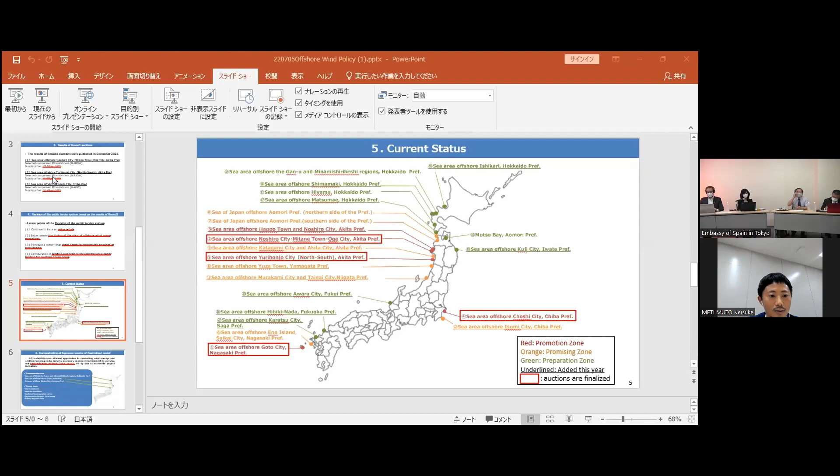Hello, everyone. This is Muto speaking. Can you hear me clearly? Yes, we can hear you clearly. Thank you very much. Now sharing my screen. So do you see my screen now? Yes, I can see that.

Now I would like to begin my presentation. Hello, everyone. Once again, my name is Keisuke Muto, the Deputy Director of the Energy Efficiency and Renewable Energy Department at METI. I'm in charge of renewable energy, acting as the Deputy Director in this agency. Most recently, there is an emerging trend in offshore wind in Japan. So we would like to talk about the Japanese offshore wind policy introduction and the current status. Thank you very much.

Please take a look at this page. First of all, this is an overview of the Japanese energy strategy. In October 2021, there was the cabinet approval of the sixth Strategic Energy Plan, which says that by 2030, the renewable energy contribution should increase to 36 to 38%. This is a very aggressive target, and it was announced in the strategic plan.

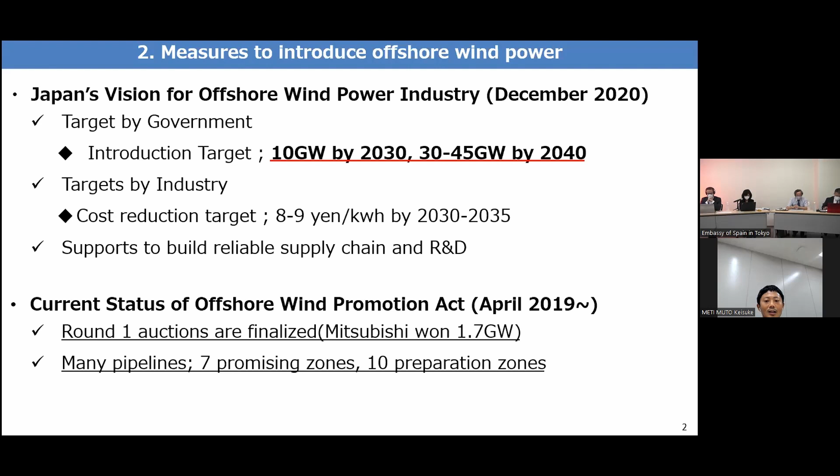And already we have 7 promising zones in the pipeline, and there are also 10 preparation zones as well. Therefore, we will be seeing more series of rounds to come. As I mentioned, for this round 1 auction result, first of all, to have these auctions, the government indicated the limits per kilowatt hour, and 27 yen, 29 yen was set as the government initiative, 29 yen per kilowatt hour.

And of course, the cost is not the only element to determine in terms of offshore wind promotion. The sea areas will be dominated for a long period of time. Therefore, it's very essential to have good collaboration with the local participants and residents, as well as the fishery industry, and have good project operations itself. That feasibility is very essential to determine the result. But still, we believe that this round one auction was very successful.

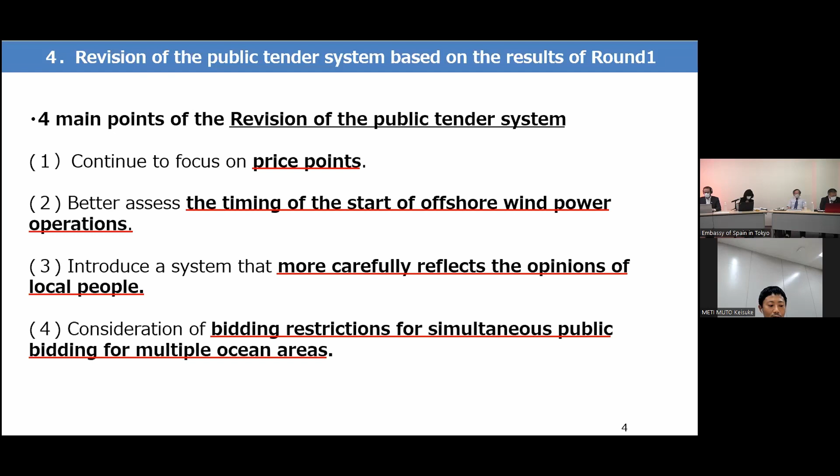However, we do not want to disconnect the supply chains or create inefficient supply chains. So that's our potential concern. So if we are to provide some kind of limit, we need to ensure the volume of the project as well. Probably 1 gigawatt should be allowed. Maybe we should offer the tenders on a 1 gigawatt basis. So that's the first stage.

So this is our current state of pipeline creation. Areas where we have made public tenders are highlighted in red, and those areas have already been finalized.

Orange areas are the promising zones, and at local municipalities, we are conducting some consultations and trying to promote them to the promotion zones. So when they are promoted to the promotion zone, they will be under the auction. So we would like to promote those orange areas.

And the green areas are the ones that are interested in this offshore wind, especially in Hokkaido, Tohoku, and Kyushu areas. We see those zones coming up. And not only those areas, but we'd like to create more of the pipelines going forward. That would be our continuous effort going forward. And every year during the summer period, we scrutinize new potential zones. And this summer, we will update this map as well.

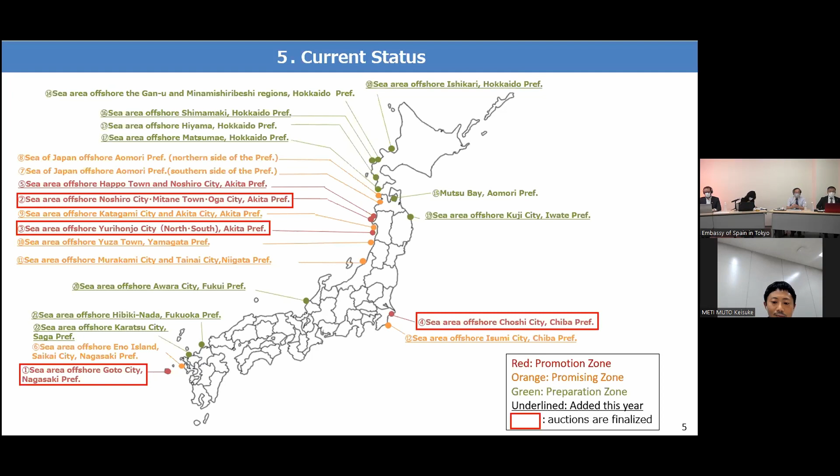And overseas, in order to promote offshore wind, these countries are saying that rather than having redundant research done by operators, the central government should run the research and provide the necessary information, which would be more efficient. That kind of debate is being held. So we in Japan are thinking about introducing this system.

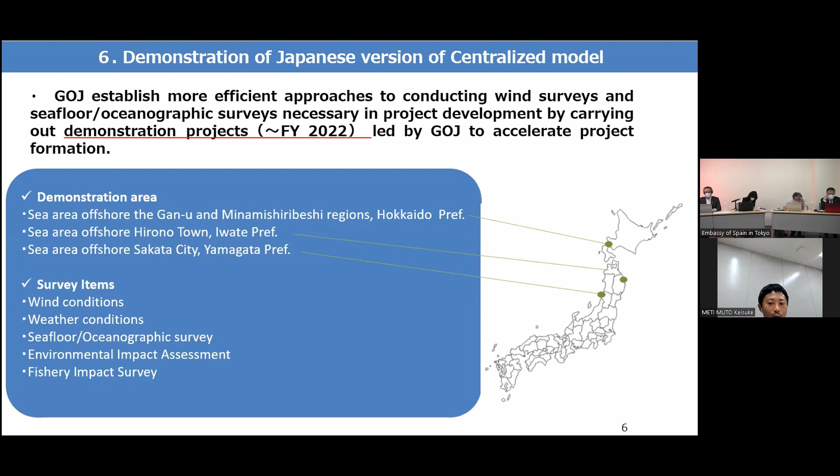Specifically speaking, what kind of research specifications would be adequate will be demonstrated in three areas in 2022, and from 2023, JOGMEC will be outsourced to run these surveys, governed by the central government, to survey the wind conditions and so forth. And based on this data, from 2025, we will run the public tender based on the data offered by the central government. This is my last slide.

These are the floating offshore wind activities. The central government has a Green Innovation Fund, especially for large and inexpensive projects. We are favoring to offer this fund, and we have two phases, 1 and 2. In phase 1, for floating offshore wind, we are developing cables, blades and so forth. So we are developing the elements of offshore wind.

And in phase 2, we will demonstrate the large-scale floating system, leveraging the phase 1 results so that we will be able to apply that to large-scale commercial projects. And we would like to leverage those phase 2 demonstrations for future commercial projects. So briefly, I have explained the current state of the policy around Japanese offshore wind. Thank you very much for your attention.

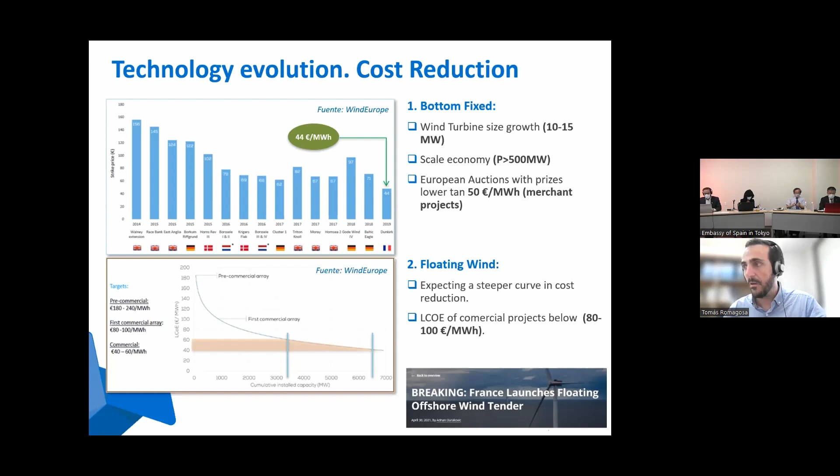Considering floating wind, which is the technology that will be applied in Spain because we have very high depths and a very short continental platform, in Spain we will surely go for floating wind. The costs are higher, but we expect a cost reduction even steeper than bottom fixed. The strike price for the French offshore wind tender was around 120 euros per megawatt hour, but probably the project will go down below that strike price and even below 100 or 80 euros per megawatt hour.

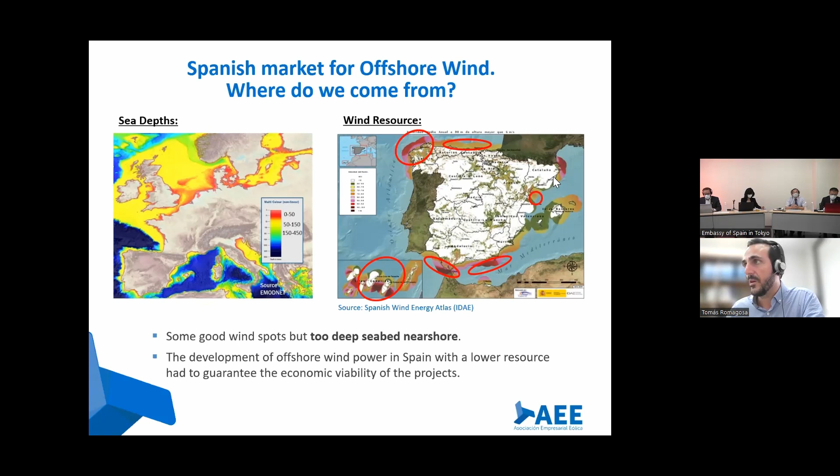What is the situation of the regulatory framework right now? Well, that is one of the main problems blocking offshore wind development right now, because we don't have all the regulatory pieces ready and approved. We have some of them. For example, we have a general auction design framework, which has been used for onshore projects and for solar PV projects since November of 2020, so that is already approved.

And also we have a Spanish offshore wind energy roadmap, which was published in December of last year, but we still have pending the approval of the maritime spatial planning, and also the regulation of the permitting process specific for offshore wind farms. We have a permitting process for all onshore technologies, but offshore wind farms have some particularities that have to be modified, and this is also pending.

So now the government has closed the possibility of presenting new proposals for offshore wind projects until all this regulation is finally approved. What our government has in its plans is that by the end of this year, by the fourth quarter of 2022, we will have all this pending regulation finished.

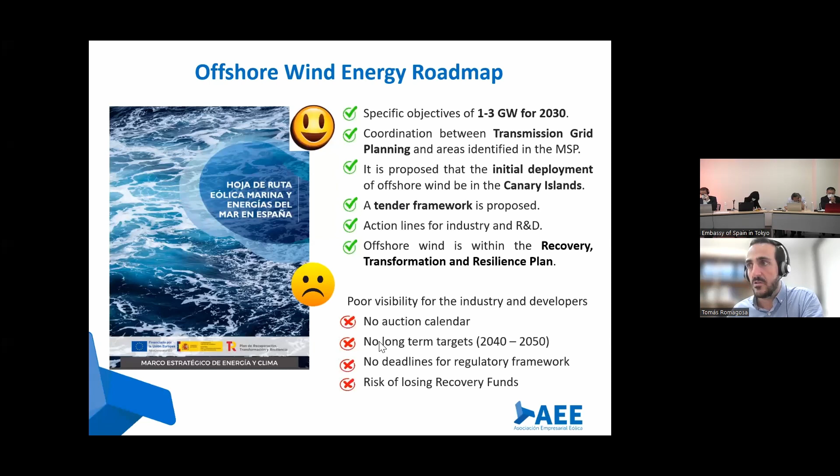Another characteristic of the Spanish market is that we already are a very important industrial hub for offshore wind, because we have all the value chain that is needed to build up and to design an offshore wind farm. We have a very strong wind industry, onshore wind, with powerful wind turbine manufacturers in Spain.

We also have a very powerful port and harbor network, and also a very powerful network of shipyards that are already exporting bottom fixed and floating structures to other European wind farms, mostly in the North Sea. So we have all the value chain represented in our country. That is an advantage for the development of offshore wind farms when the local market starts.

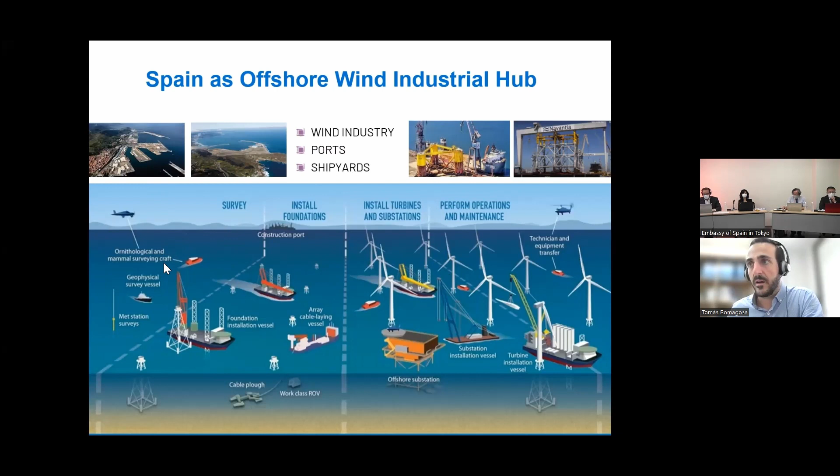And in fact, of the 13 projects that have already been built for floating wind all over the world, 11 of them have had the direct participation of Spanish companies. An important characteristic for the industry is that since April of this year, the European Union already accepts to include in the energy auctions some criteria different from the price of the energy.

So now in the auctions, our governments can include up to 30% of different criteria related to local content, employment generation, economic development, and industrial local content. So up to 30%, and this will probably be used by the Spanish government in these offshore wind farms. Still, the specific criteria are not defined, but this is already allowed and will probably be used by our government for the first offshore wind auction.

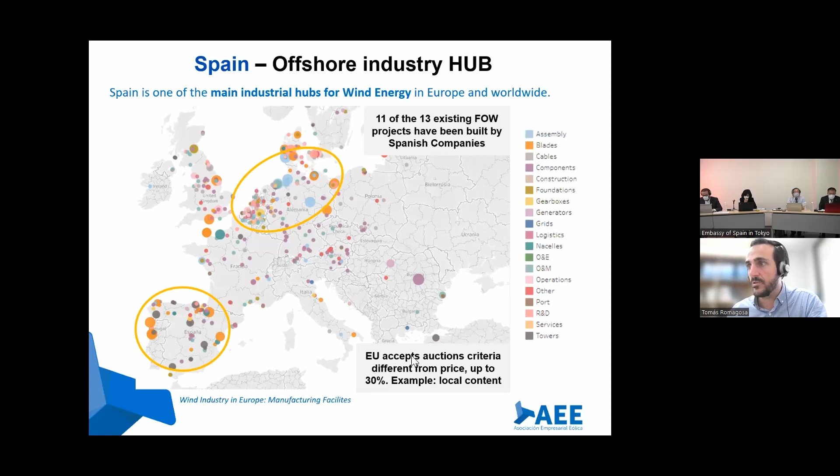Another characteristic of our market is that we are also a powerful innovation hub for two reasons. The first one is that we have a specific testing facilities and research and development infrastructure network. It is called MARHIS. It is a very powerful network composed by different testing facilities and innovation centers and technological centers interconnected together,

and each one specialized in different areas. But a company that wants to develop a new floating structure, for example, has in Spain a very good ecosystem of technological centers, laboratories, and testing facilities to do so. In fact, we have 2 testing sites. One is called BIMEP in the north of Spain, in the Basque Country, and the other is Plocan in the Canary Islands, where demonstrator projects and prototypes can be tested in real conditions.

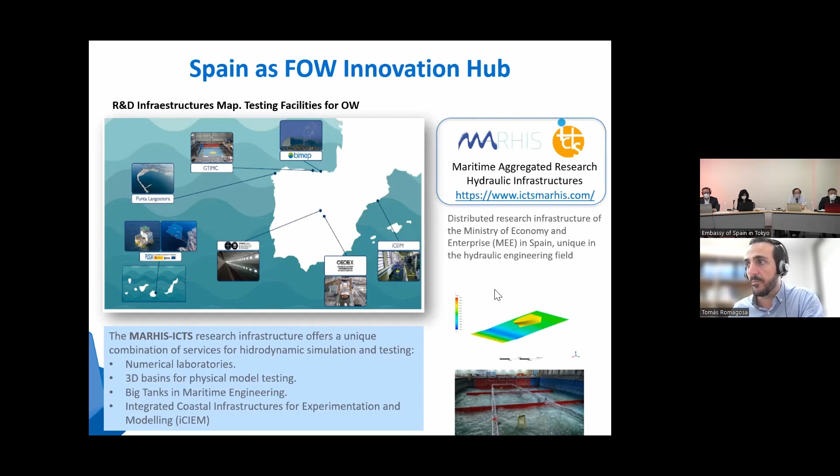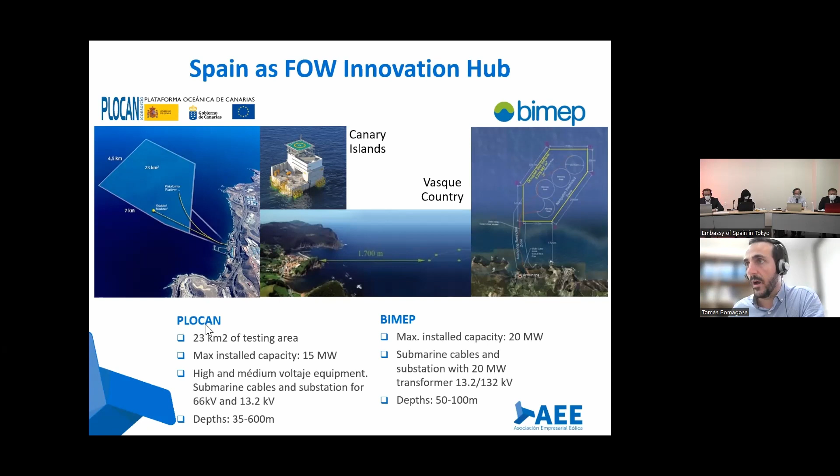And this makes also a good ecosystem for research and development in offshore wind, apart from all the commercial opportunities that there are for big offshore wind farms. And the second reason for being an innovation hub, well, here you have some more details about Plocan and BIMEP, these testing facilities, the characteristics, the surface that is available in each one of them. Later we will have the presentations from SciTech and from Plocan, so they will better explain these facilities.

But the second reason for being a big innovation hub is that we also have a lot of companies that are developing different solutions for floating structures to be able to decrease the cost of this technology. And nowadays, from more than the 50 floating solutions that are identified at global level, 14 of them correspond to Spanish patents made up by the participation of Spanish companies.

And these are active solutions that are being developed in different TRL levels, but trying to achieve a commercial level. So that is also a good characteristic of the Spanish market, that you can find powerful companies already with good technology development. The Spanish roadmap, in fact, identifies the support to R&D activities as one of the priorities.

And with these recovery funds that come from Europe to be able to improve our conditions after the post-COVID crisis, our government is going to use 200 million euros to support marine energies technologies and funding R&D projects and the demonstration of prototypes, and the reinforcement and the development of new testing facilities. These funding lines will be published during the second semester of this year. So this is also a good opportunity for funding demonstration projects that will come in the following months.

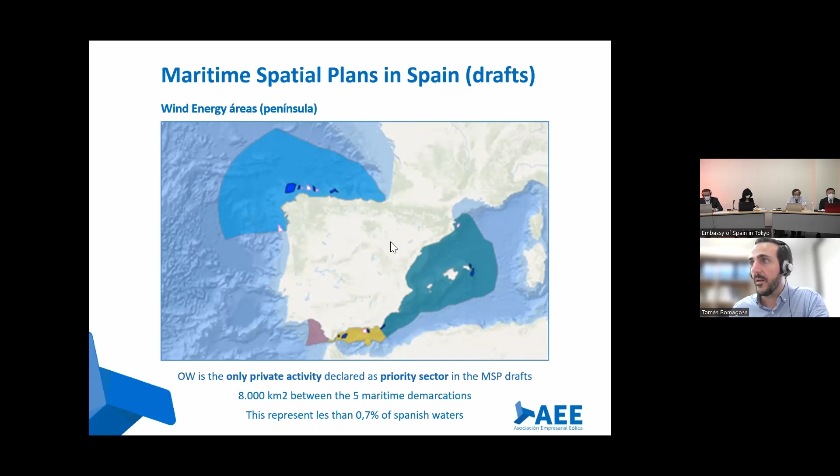But still, the compatibility with other activities is something that has to be better analyzed, because there is a strong opposition from some sectors such as fisheries and tourism. So this is something that has to be dealt with, and we will enter later on in other slides. Important messages of this maritime spatial planning criteria. Well, we have already commented that we have high depths, so we must go to floating solutions. We have good resource areas with sites that have wind speeds over 9 meters per second.

The MSPs already consider all the environmental protected areas, so all sensitive areas are avoided. So the permitting of the projects will be easier in theory, because no environmentally delicate areas are being used, and also other activities have been taken into account to assure a good coexistence between defense activities, fishing, aquaculture, also maritime traffic, and research and development activities.

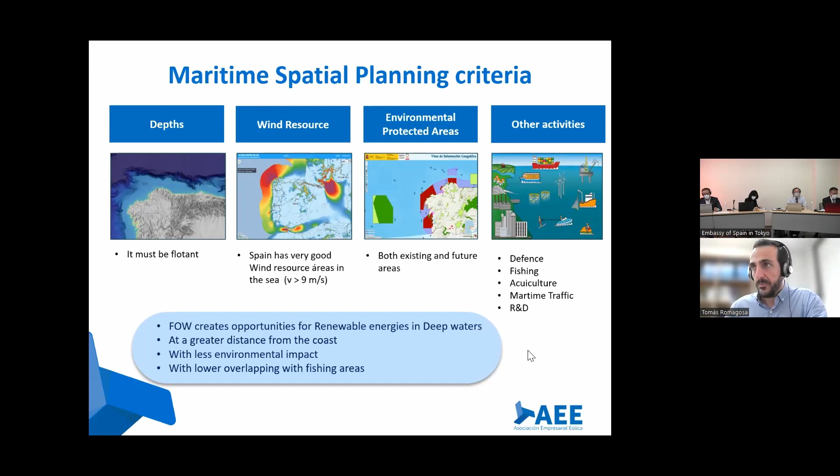However, although they have been taken into account in these maritime spatial plans, there are still some problems in some specific areas that have to be better analyzed when the specific projects will start to be developed. How are the projects going to be developed? Well, this is something that is not still written on paper because the regulation is not still approved, but we already have some hints from the offshore wind roadmap. And so we can see that probably the tenders will have a model similar to the hybrid tenders that have been followed in other countries.

Mr. Romagosa, sorry, you have 1 minute left.

Okay, perfect. For example, well, there is the model of a decentralized tender, totally decentralized, where all the bidders can place their proposal in any part of the sea. That is a model, for example, that is followed in the UK.

Opposite to this decentralized model, there is the centralized tender, where the government specifically defines the detailed area, with all the coordinates of the site that has to be bid by all bidders. So all bidders have to place an offer for this same area.

And the model that is going to be used in Spain is a mixture of these two. It's going to be a hybrid tender where the government specifies a big area designated in the maritime spatial plans, and bidders can place their proposals inside this area, but with the liberty of proposing different projects inside them.

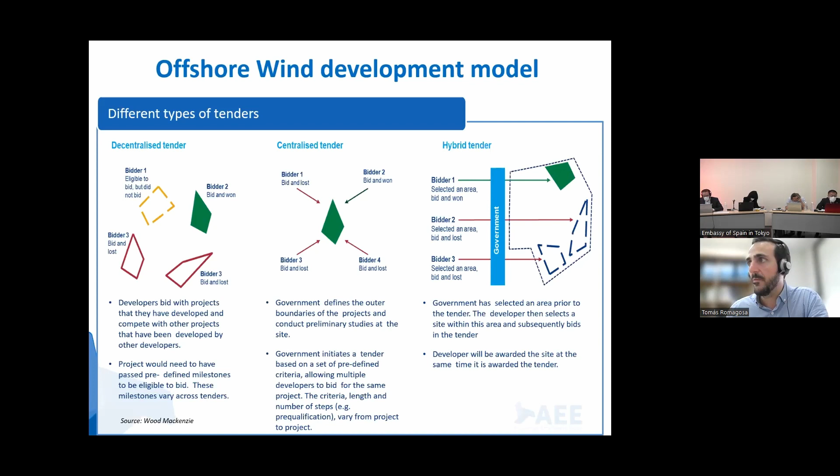So if we go to this other slide, we see that in this big area, in this example, three developers have presented projects, but only one of them is going to win because it's the most cost effective and it follows the criteria of the auction better than the rest.

So this probably will be the model used in Spain, and the developer that wins the bidding process will be awarded with a long-term contract for the energy produced, probably a CfD, contract for difference. He also will be awarded with the leasing of the maritime area where the project will be located, and also with the grid connection permit to be able to evacuate all the energy generated.

Very quickly, some important messages. We have in Spain a strong opposition from the fishing sector. You can see here some examples of news that have appeared recently in different media in Spain of fishing cooperatives requesting that offshore wind is not developed in Spain. Some examples of them.

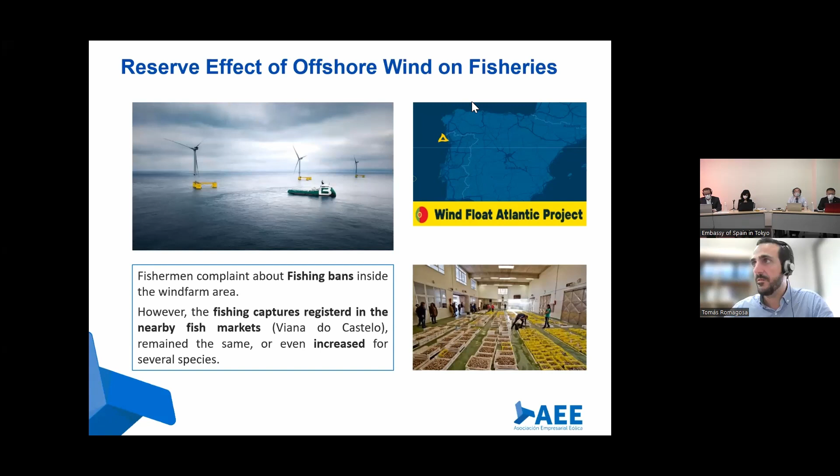This is something that is now strongly being debated in Spain, and the opposition is mainly focused on some specific points, and it can be dealt with correctly. And also, another example of misunderstanding of offshore wind development that causes public opinion to go against offshore wind is that sometimes the administration, public bodies or the government do not explain how projects will be developed.

In the Canary Islands, for example, there have already been published in the newspapers 16 projects accounting for 1,500 megawatts, but all these projects are competing for the same site, the same geographical area, which is a small area that can only fit 300 megawatts. So only 300 megawatts will really be installed in these areas, because all the existing projects will be competing in an auction between them.

So not 1,500 megawatts will be awarded, only 300, but the public opinion does not understand it, and they think that all the coast will be full of wind turbines, accounting for a total of 1,500 megawatts. So it is very important for all the public bodies, administrations and governments to do a dissemination campaign and to explain how offshore wind will really be developed, so that the public opinion and the different sectors understand it correctly.

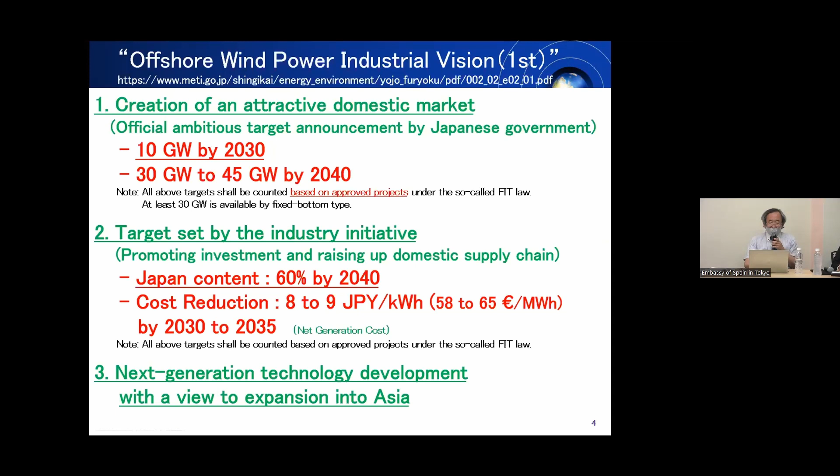Back in 2020, then Prime Minister Suga declared carbon neutrality by 2050, and to achieve that, the offshore wind project was announced. That's the starting point of this good momentum. I would like to skip a few pages, as you may know already. By 2030, 10 gigawatts was the declared target by the government, but this is on an approval basis, because here in Japan, approval and licensing take a lot of time. Therefore, in terms of operation, I don't think 10 gigawatts will be ready by 2030. So actual operation would be 5.7 gigawatts by 2030. That is the current assumption.

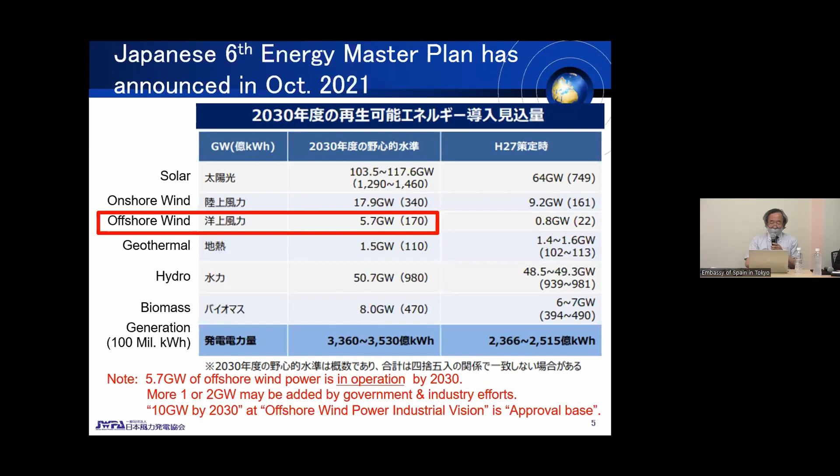And as you can see, this is the Japanese sixth energy master plan, with 5.7 gigawatts by 2030. So the difference between the 10 gigawatts and the 5.7 gigawatts comes from the definition, whether it is an operational basis or a licensing basis. So these are compatible; 10 gigawatts by 2030 and 5.7 gigawatts by 2030 have the same meaning.

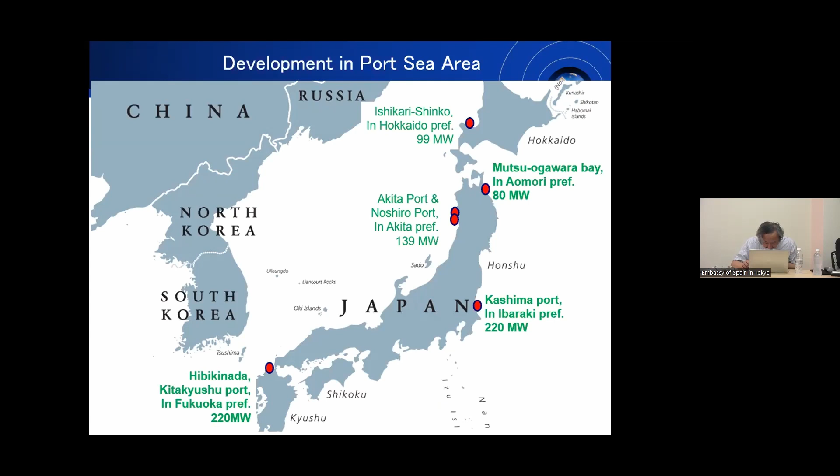So you can see this is the port sea area. There are some marks plotted on the map: Ishikari Shinko in Hokkaido, Mutsu Ogawara, Akita Port, Kashima Port, and also Hibikinada and the Kitakyushu port. In that order, the auction is in progress. Right now, at Akita and Noshiro ports, the construction is almost finalized. By winter this year, the start of operation is expected. Next is Ishikari Shinko and Hibikinada. The construction now begins, so we will be able to see operations in a few years from now.

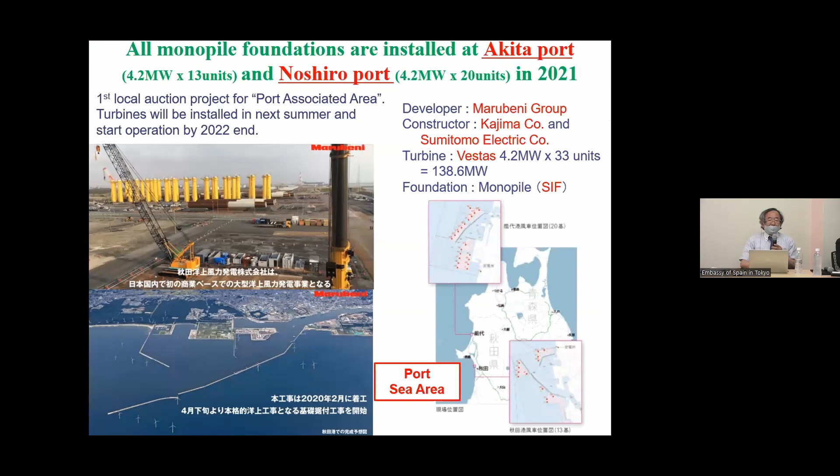Now, this is the picture of the Akita port and Noshiro port construction site. And in Akita, in November this year, our JWPA association, together with GWEC, will hold the second GOWS Japan conference. That is scheduled for November 9th to 10th. I hope you will be able to participate in this event.

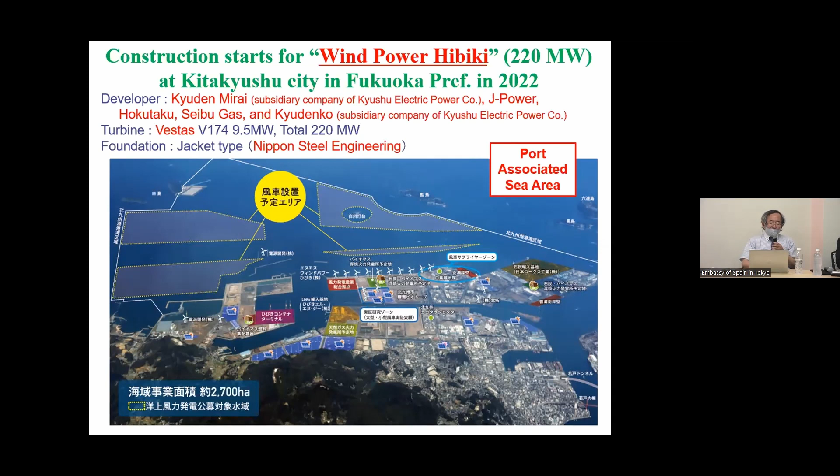And in Kitakyushu, there is the wind power Hibiki project going on. The difference between the Akita project and this one in Kitakyushu is the capacity of the wind turbines, because in Akita it was 4.2 megawatts only. However, for Kitakyushu, we need to pursue more economic viability, so more power generation was needed. So 9.5 megawatts, more than double the capacity, is required. That is the project for Kitakyushu.

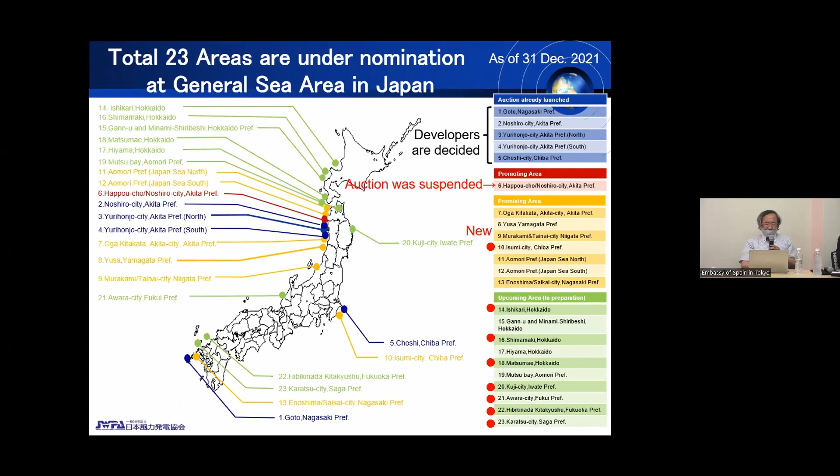A total of 23 sea areas are under nomination by the municipalities, of which 4 areas were already auctioned, and for the upcoming areas they are now working on the auction process. In terms of round 1, the auction results at a glance: at the top, you see Goto. This is floating, at the price of 36 Japanese yen per kilowatt hour, the feed-in price for this project, which is done by Toda. Akita, Yurihonjo and Choshi in Chiba Prefecture are the remaining 3 projects. Total of approximately 1.7 gigawatts, and the Mitsubishi and CTEC consortium won these 3 projects.

And surprisingly, the price: 29 yen per kilowatt hour was the upper limit designated by METI, but for Yurihonjo you see 11.99 Japanese yen per kilowatt hour. It's so inexpensive. In a sense, it is really epoch-making. When we started offshore wind in Japan, those against renewable energy said the cost was too high and offshore wind power was not usable. But they were distracted, because they saw the price went down to approximately the same as thermal power, which is 12 yen per kilowatt hour. So this is really an epoch-making outcome, because the anti-renewable energy advocacy kind of ceased. And Mitsubishi and CTEC won the 3 projects.

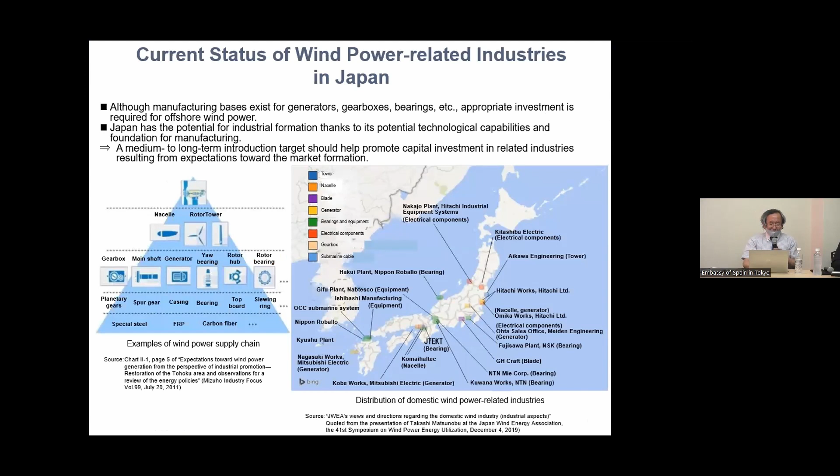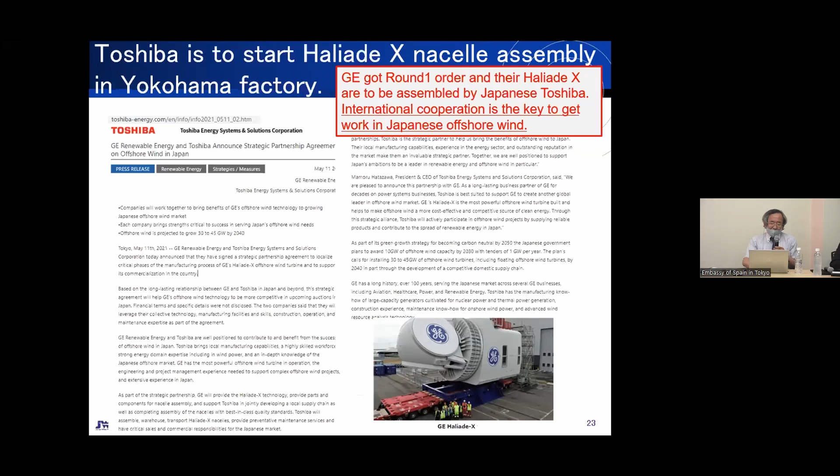And in the round 1 auction, it looked as though only Japanese companies won. However, behind the scenes, the key factor was the combination with an overseas company. Mitsubishi actually had acquired Eneco, and they have the know-how from that company. And when we look below tier 2, Mitsubishi is using GE's Haliade-X wind turbines, which are manufactured by Toshiba in the Yokohama factory.

And for floating offshore, Toda won the round 1 bid at Goto in Nagasaki Prefecture. Hitachi's 2.1 megawatt turbines, 8 units, have been purchased, and they will start construction soon. However, this is the only commercial project that we see now. Maybe Iwate's one has a specific schedule, but the others are not clear yet.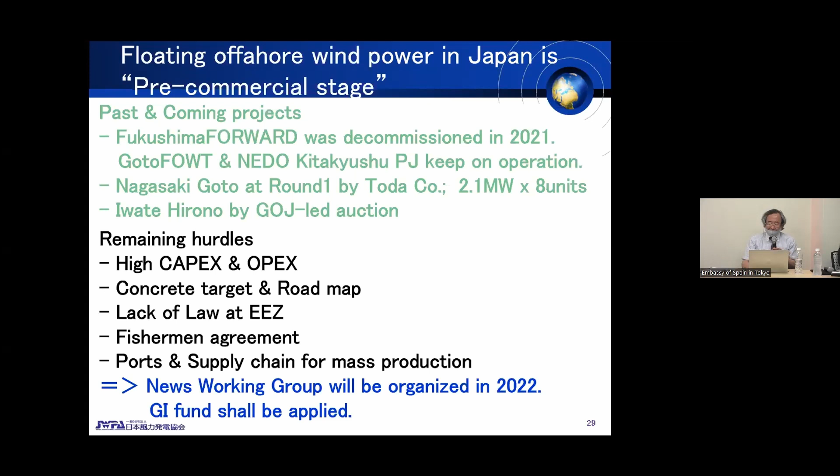And earlier, Muto-san said that with the Green Fund, leveraging this Green Innovation Fund, we'll be able to understand the arrangement and how to attract and so forth. And that's the current overview of Japanese offshore wind power.

Yes, thank you very much. Mr. Ueda, you went to Bilbao, Spain, for the Wind Europe convention. Could you share your impression of that convention and expo? You also participated in the visits as well. Well, Spain is getting back to wind power. That's my impression. It is the second convention held in Spain.

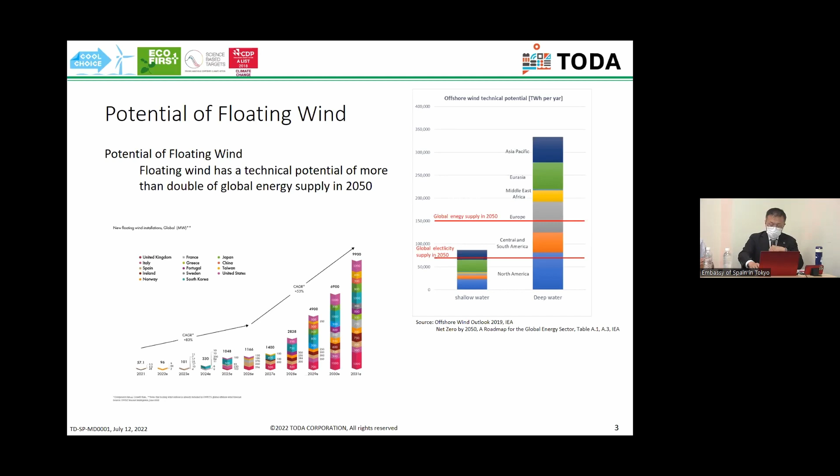Why did we select the spar type model? There are two reasons: one is the ability of mass production, and the other is stability. Compared to other structure types, the spar structure itself is very simple, so it's very suitable for mass production. Also, the center of gravity is lower than the center of buoyancy, so it is very stable. Even if it tilts over, it will return to the normal direction. So it is very, very stable.

So for the floating structure to be used for wind power generation, there are many forces affecting it. At the sea surface, there are many waves, so a very strong bending force will be applied on the floating system. On the other hand, in the deep water where the spar would be introduced, a very strong water pressure will be imposed. Therefore,

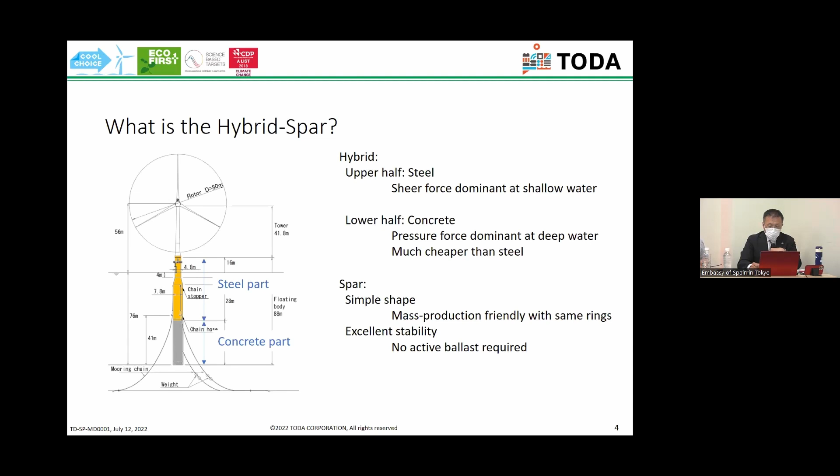in areas with the bending force, we adopted steel, which is very resilient against such a bending force. And where very big water pressure is imposed in the deep water, we use concrete, which is very resilient against such water pressure, as well as very economically viable.

And here is a picture and the history of the hybrid spar project. The development began in 2007, actually more than 10 years ago. We started with a 1/100 scale model in an indoor pool in the university lab. Then every year we tried to increase the scale, taking a step-by-step approach to improve the design technology.

In 2013, with the Ministry of Environment, we were awarded the demonstration project to install a 2 megawatt floating wind turbine at Goto Island of Nagasaki. And in 2016, commercial operations began in the private sector, and it has been in stable operation for the 9th year since then. So I would like to show you the video.

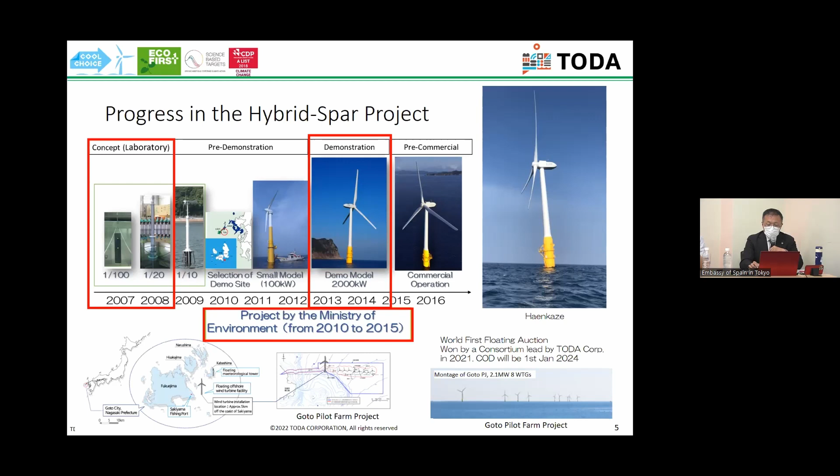Muto-san of the Renewable Energy Agency said it was round 1. So I think it's fair to say our award was round 0, and we were the first in the world awarded for this project. And this is the final design of the project. As you see, we've been operating for the past 10 years.

So we encountered a variety of typhoons of various sizes. In July 2018, a big typhoon approached our wind turbine. You can see the video now. In the left-hand camera, as you can see, something is moving. This is the blade. So it is generating power.

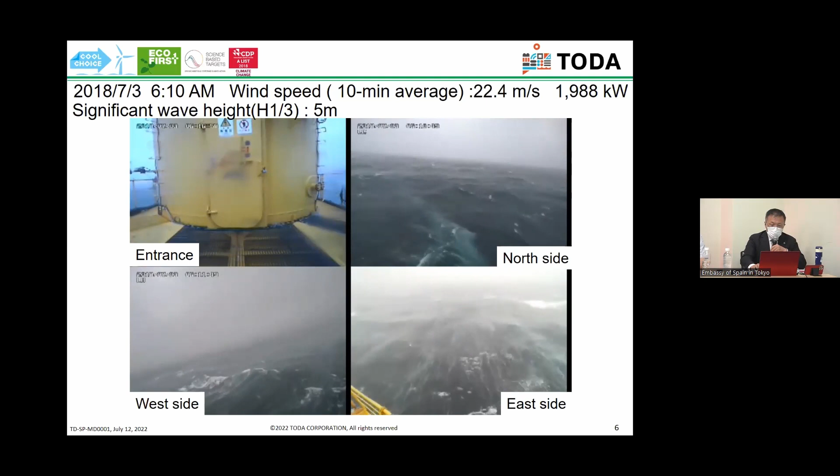The wind velocity was 22.4 meters per second on average, the wave height was 5 meters, and the maximum was 7 to 8 meters. Output was 1,988 kilowatts. That is the picture at 6 a.m. Next, you can see the video at 11 a.m. on the same date, when the wind speed was 52.2 meters per second.

Of course, we stopped power generation during that typhoon. The significant wave height was 7 meters, and the maximum was over 10 meters.

I forgot to mention earlier, it is 5 kilometers away from the coast, and whenever a typhoon approaches, there is no visibility from the port or coast. There is only one wind turbine, so all the visibility we have is the camera attached to this floating offshore wind turbine. Please take a look at the video at 52 meters per second.

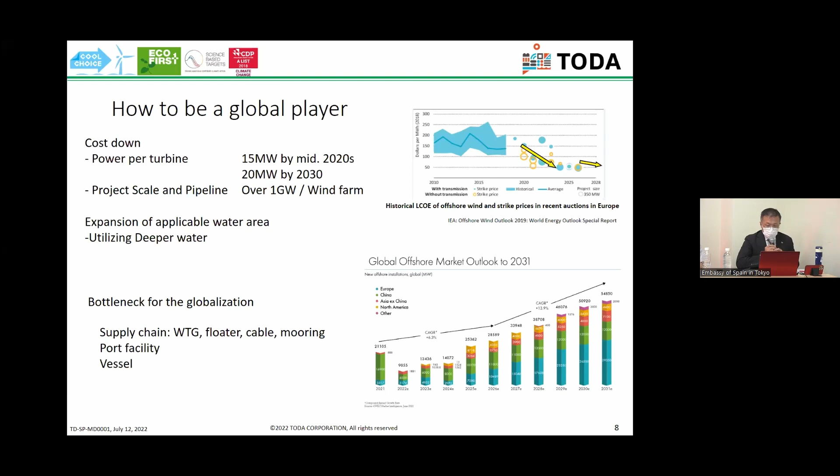In a nutshell, for floating offshore wind power to penetrate the global market, we need to solve these issues. And at TODA, to solve those problems, we prepared the solution. With that, we were able to win the first global auction. So I would like to explain the details. The manufacturing process.

What we are thinking about is to allow anywhere and anyone to be able to manufacture. Not preparing a new port, but leveraging the existing port facility, or the thermal plants' residuals. And also we are able to leverage the workers at coal-fired plants as well.

The hybrid spar, as mentioned earlier, is a very simple design. We are connecting steel and concrete. It doesn't require high technology or engineering. Of course, the designing requires high capability. However, in the manufacturing process, there is no high capability required.

And in the process of the manufacturing, as you see at the bottom, it is possible to connect the same structures multiple times, which means that it is possible to mass manufacture this. So at Goto, we have already started to build the floating offshore wind.

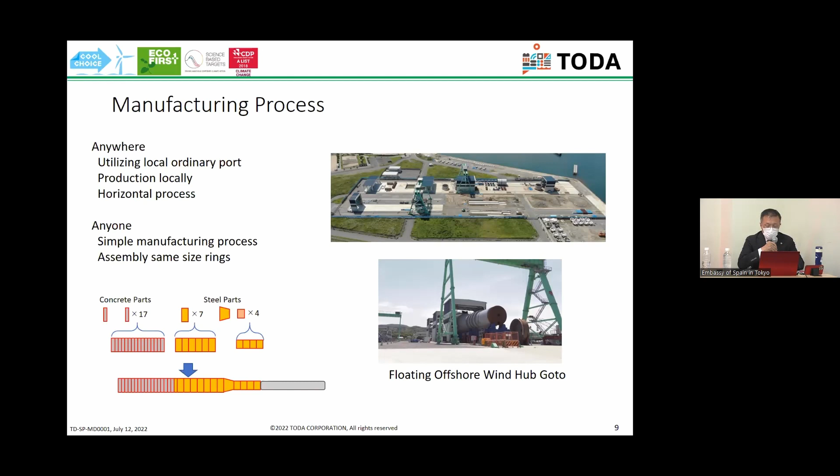Floating Offshore Wind Hub Goto is 100 kilometers away from the main island, at Fukue Port, which is a very small local port in Goto city. So as you can see, we are manufacturing on a very small island. If this isolated island in Japan could manufacture the hybrid spar, then at the Canary Islands, of course, you'll be able to manufacture this.

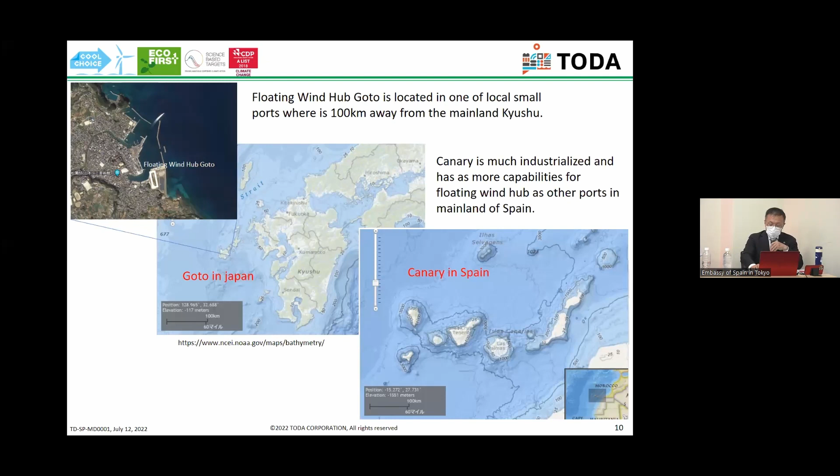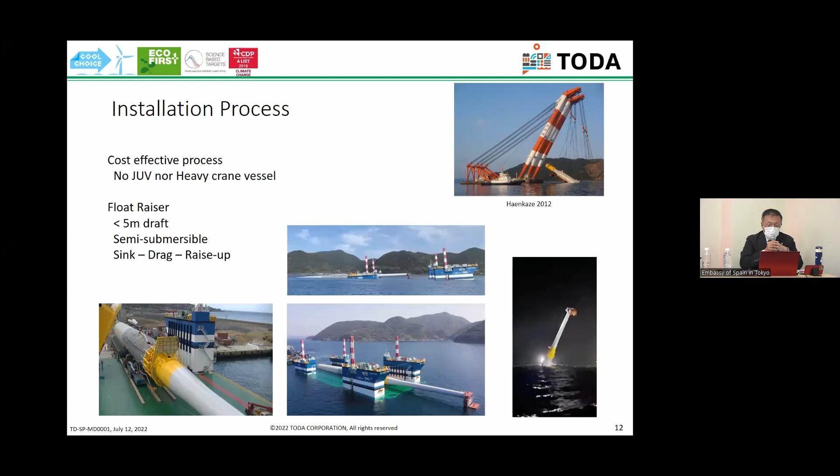So let me show you the actual manufacturing process. This is the actual manufacturing process. A jack-up vessel or large-sized crane is not required. At the top right, you see the large crane photo, but this is a photo from back in 2012. So we don't use this huge vessel for this hybrid spar.

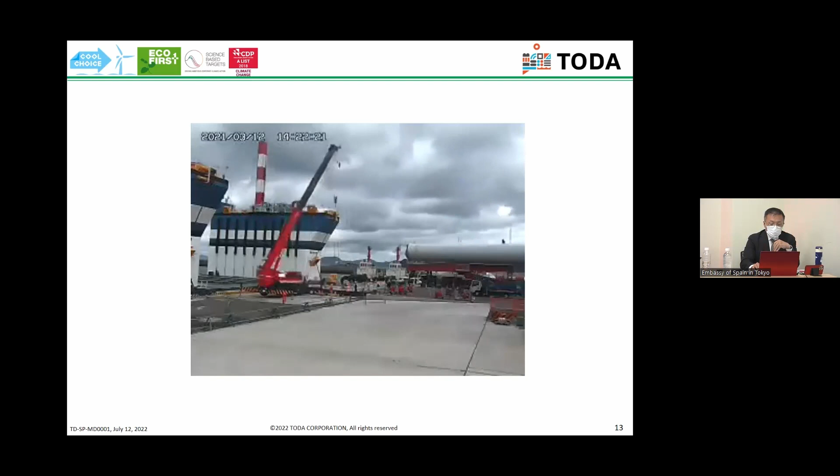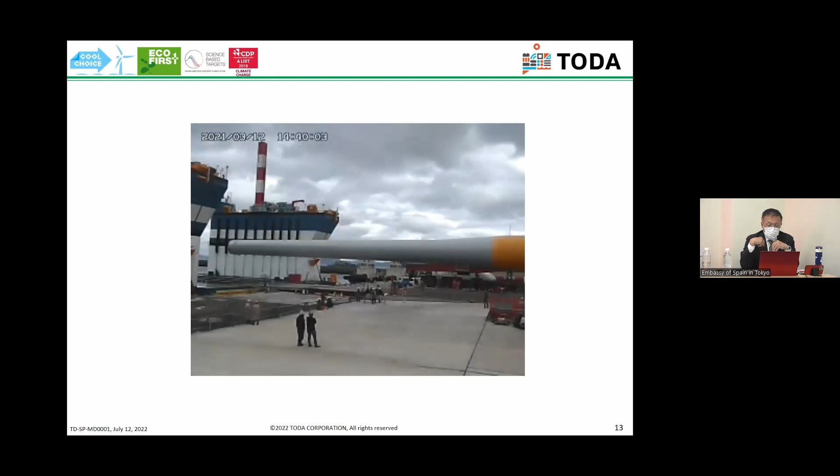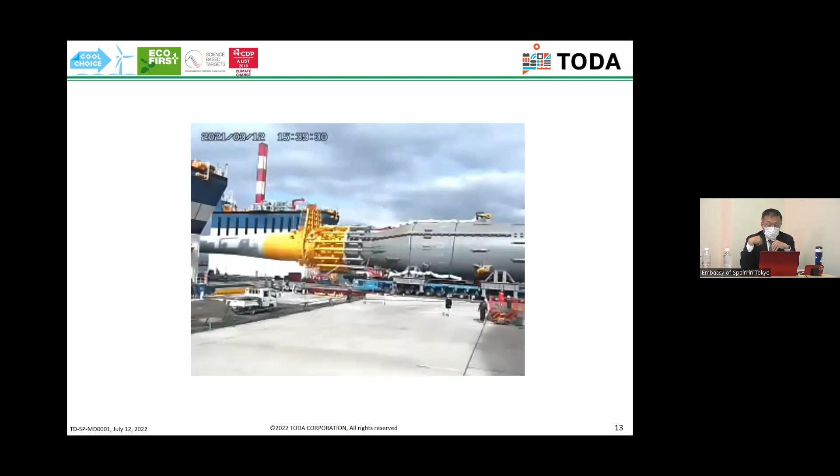And we are going to load this hybrid spar on the vessel on the left-hand side. What you are looking at is the tower. The yellow part is 15 meters high from the water surface, and this gray part is the floating object. It is the steel part, and the lighter gray part is the concrete part.

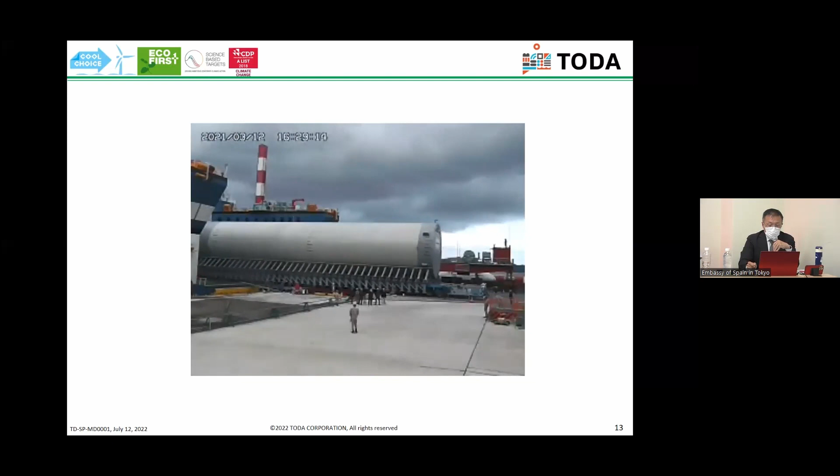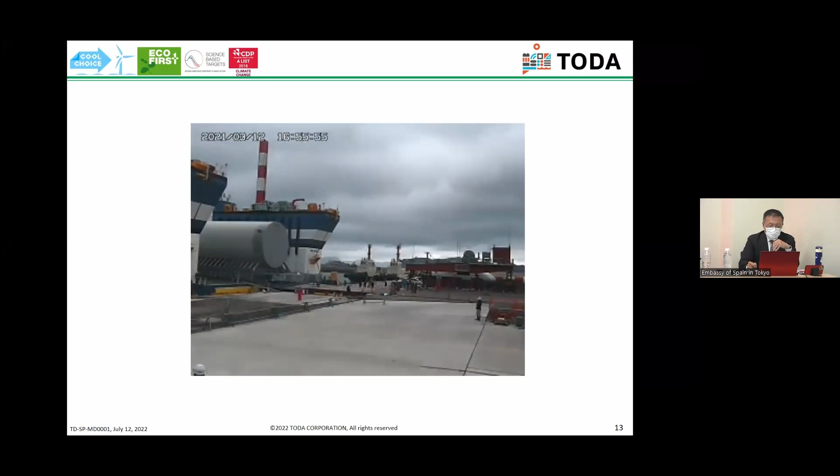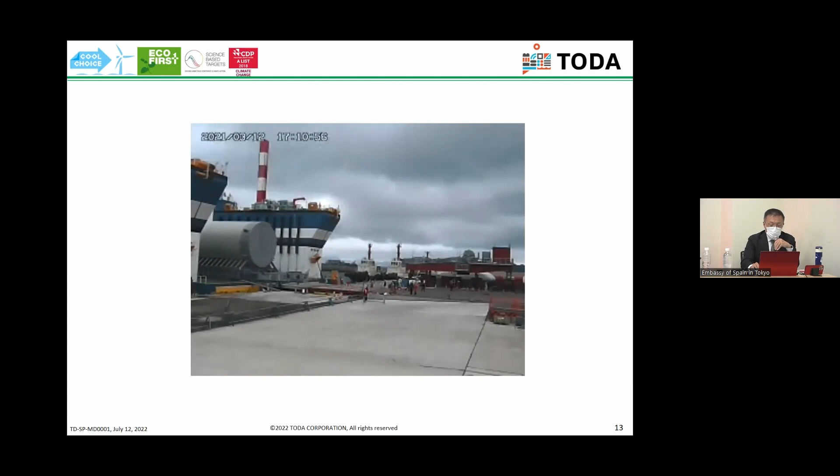Then we go offshore and float this spar in the water. So you have 1 minute left.

So you have the vessel and the spar starts to float. And this floating part is floating autonomously. And this is the speed; it takes about 20 minutes to make this spar float. And then we feed water in this object and let it stand.

So this is our concept. AAA: Anyone, anywhere, as required. A very simple design with a simple manufacturing process is adopted so that anyone can manufacture this. As you saw, the port facilities didn't require heavy object support, and it could be applied to various sea areas.

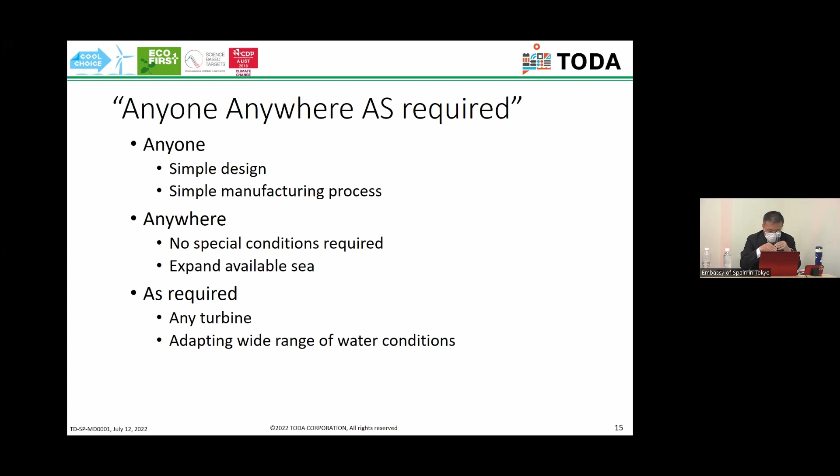This is a summary. The potential: 10 gigawatts by 2031. And I had explained our hybrid spar and how we can become a global player. That's something I had also explained, and also our cost reduction effort and anywhere as required.

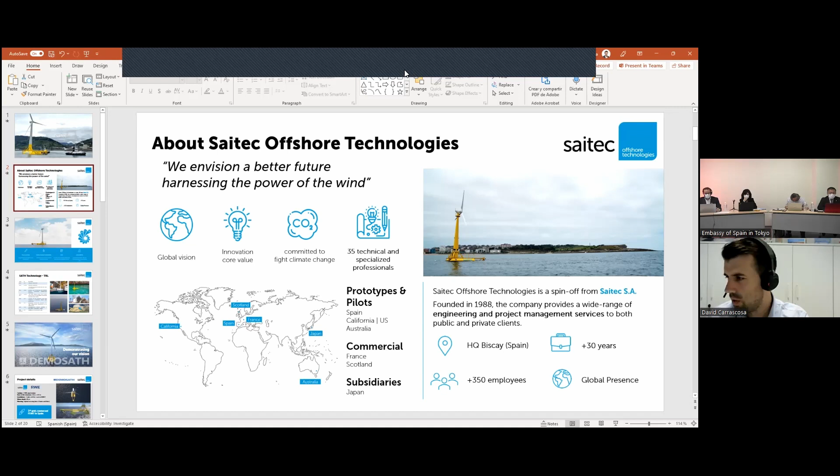Okay, so that's it. Can you please confirm that you're seeing the screen? Oh, yes, we can see it, but we can see the gray. Maybe you shared your audio and the video. Yeah, so I've shared my audio and video. Maybe the toolbar is grayed out. Okay, let's do something. It is possible to hide the toolbar. Let me know if this one is now okay. Yes, we can also see your Zoom toolbar. Okay, that's interesting. It's complicated, right? It's okay. Yes, let's do it like that. Okay.

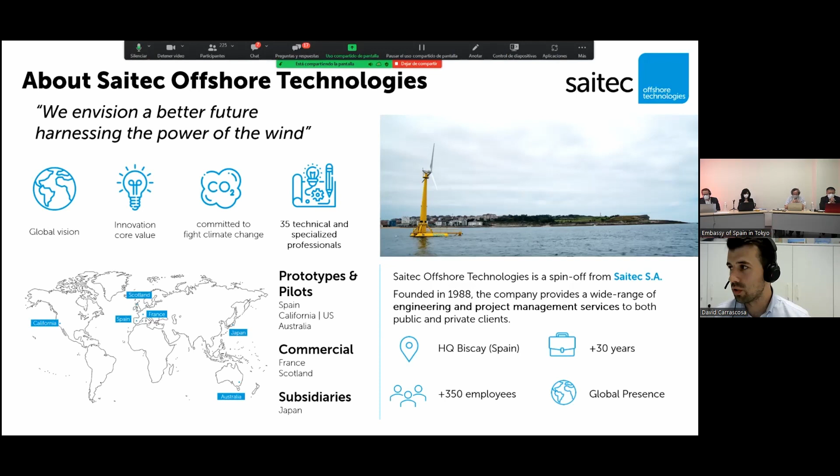Saitec Offshore Technologies is actually a spin-off from Saitec Group, a multidisciplinary engineering group with global presence and more than 350 people. We created this spin-off to focus on floating offshore wind, and that's what I'm focusing on today. We started developing a technology which we are presenting, and we are now present in various markets. We have prototypes and pilots developed in Spain, but we are also taking part in commercial and pre-commercial projects all over the globe, from California down to Australia, including Japan, where we have our first subsidiary, Saitec Offshore Japan.

The technology is called the SATH technology, and it's a concrete floater based on two horizontal hulls and a single point mooring system for the seakeeping. So the platform can rotate around that point. Some of the key competitive advantages are that concrete is very inexpensive, which makes the whole system very competitive, but it also provides a great amount of local content, as we are going to demonstrate with the figures in our prototype project.

So it does not require very experienced labor for the manufacturing of the platform, and can also be manufactured in ports with no need of dry docks or very specific shipyards.

Okay, so the technology has been developed since, I would say, 2013, where the idea started to develop. So it's been already 10 years, where we have obviously produced some patents. Then we went to tank testing. We did some offshore testing in Santander, small scale, and now we're really focused on our DemoSATH project, which is the full scale demonstrator that will go to the sea this summer. That's a 2 megawatt project, which is the project I'm going to focus on now.

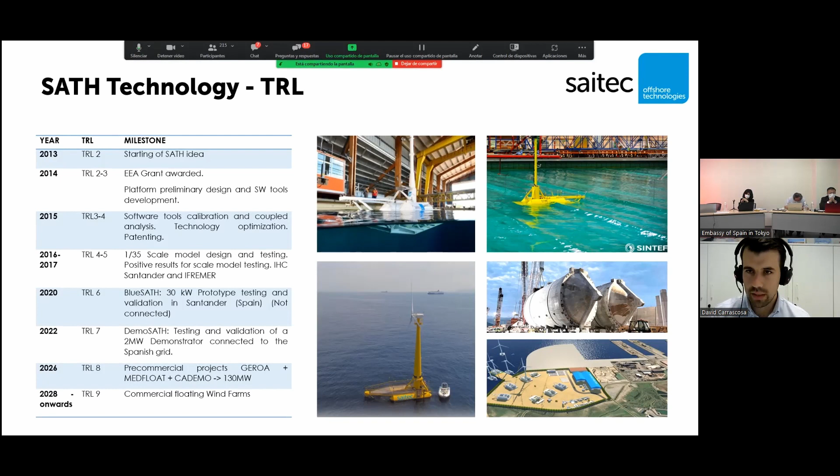But it's not the last thing we have done in floating wind. We are also developing other projects like GEROA, MedFloat, or CADEMO. These are pre-commercial projects that I'm going to speak a bit about at the end of the presentation. And we are already involved in some commercial tenders that are taking place in Europe. But not to go into too much detail on that, I will focus now on the DemoSATH project.

So the DemoSATH project is a project in collaboration between RWE and Saitec. RWE is a leading company in offshore wind. Actually, it's a super big utility coming from Germany, and it's the second company worldwide in terms of offshore wind assets. So very big company and very good friend for this DemoSATH project. RWE is partially funding the project. Saitec is also funding the project. We also included some public grants to take the final investment decision in February 2020.

And since then, we've been manufacturing the platform, which will host and is hosting a 2 megawatt wind turbine. The dimensions of the structure are 30 by 64. The installation will take place in BiMEP, and the water depth at the site will be 85 meters. The mooring system is a hybrid mooring system, combining polyester fiber rope and steel chain. One of the huge milestones of this DemoSATH project is that it will be the first floating offshore wind platform to be connected to the grid in Spain. So also a great milestone for the country.

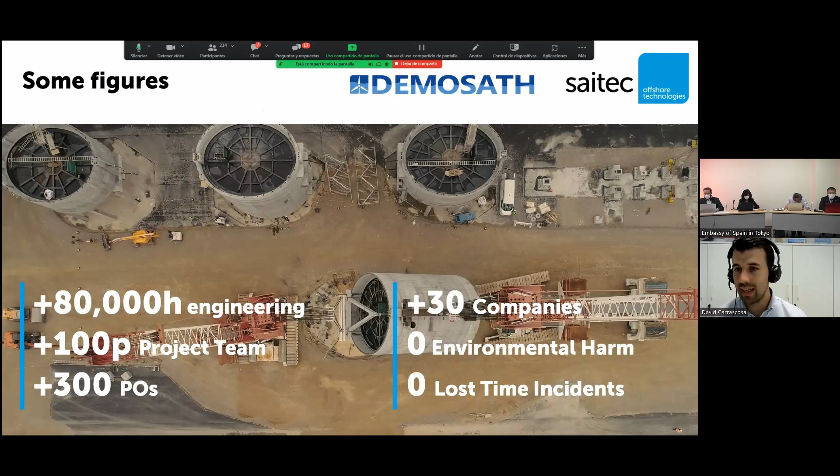The DemoSATH project is a project where Saitec is also taking an EPC role, so Saitec is managing all the contracts. We've invested more than 80,000 hours of engineering with a team of more than 100 people, and we've engaged with more than 30 companies.

Yes. You have 1 minute left, please.

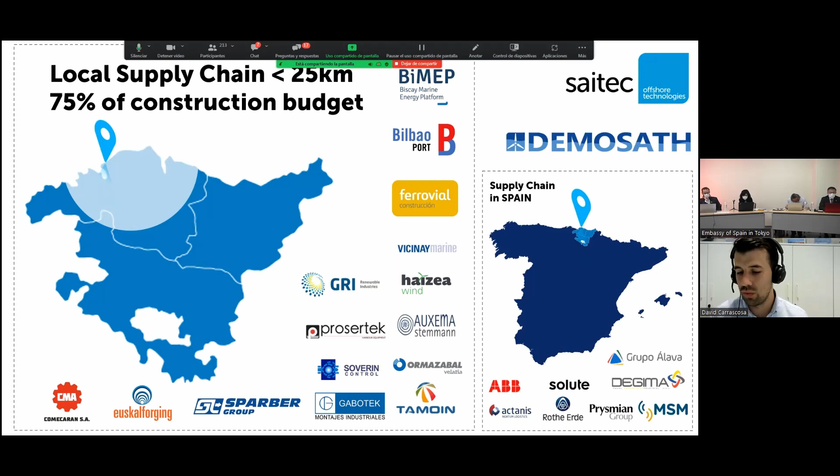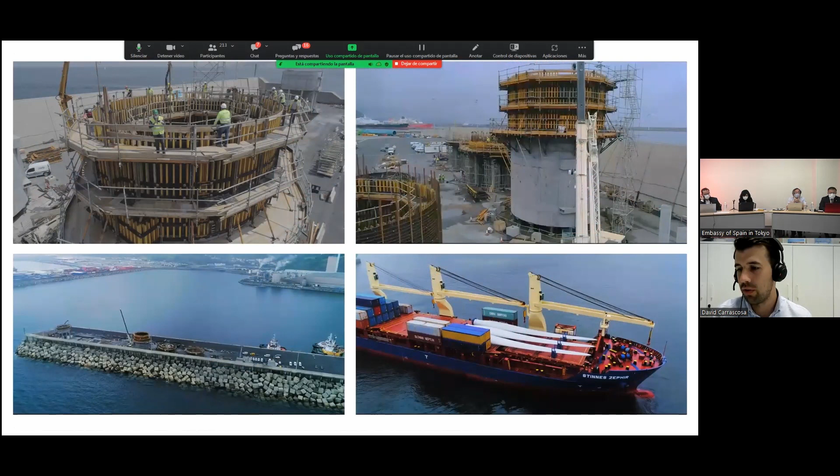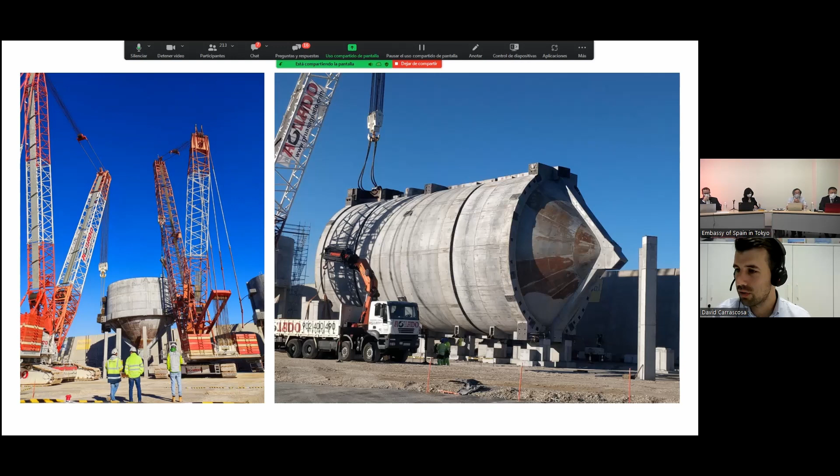Oh, okay. That's very little time, but I would say it's been a project which has been very, very local. More than 75% of its construction budget has been awarded to local companies. So if we take a look at what's been happening on the site, we've gone from the precast of the several units, then the assembly of those units to get the final hulls, and then we also installed the mooring, and the platform has been growing until today.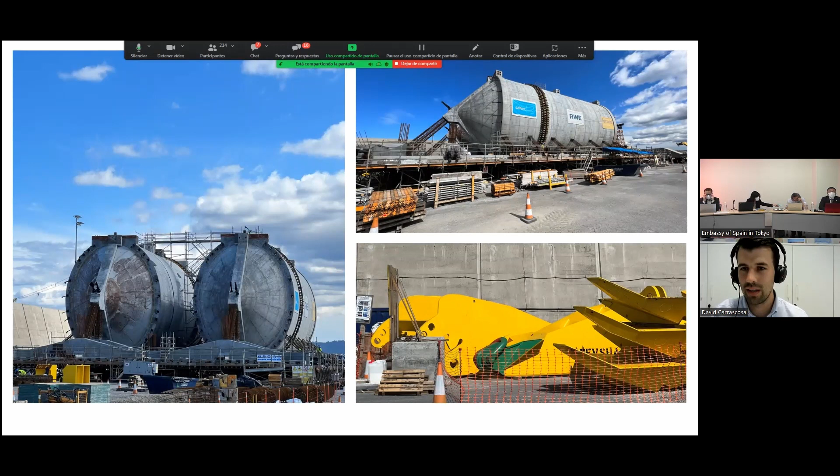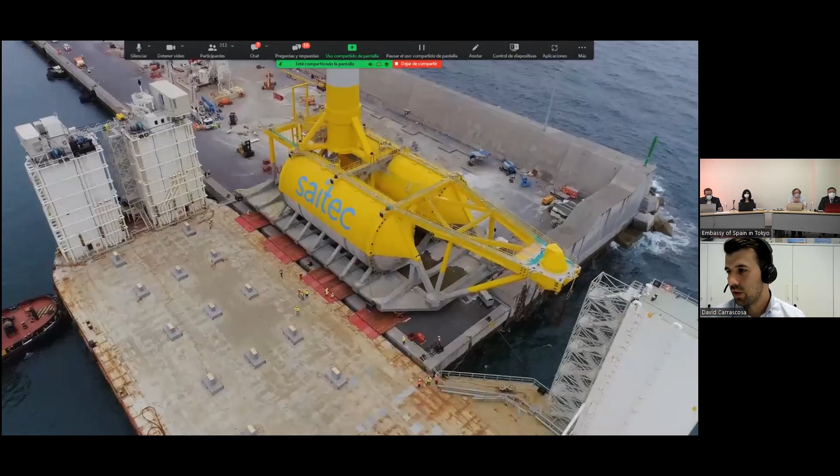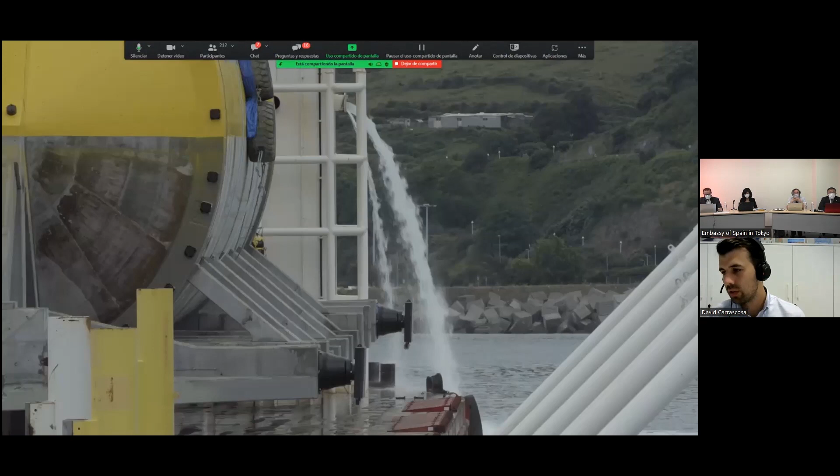I had a couple of videos. As we are running out of time, I'll go for the second video, which is the final launching of the unit. So here you can see the barge we have been using for the float off of the unit. It's a barge from BOA, and we have been using these SPMT systems to transfer the whole platform that was fully assembled and manufactured on the quay, and the launching operation was very, very successful. Everything went as planned. Even if we had some wavy environment, as you can see, the operation was a great success.

And just to conclude, my last slide is focused on these pre-commercial opportunities we are developing at the moment. There are two projects in Spain. The Geroa project is in the north. The MedFloat project is in the east of Spain, and at the same time we are also taking part in a project in the US.

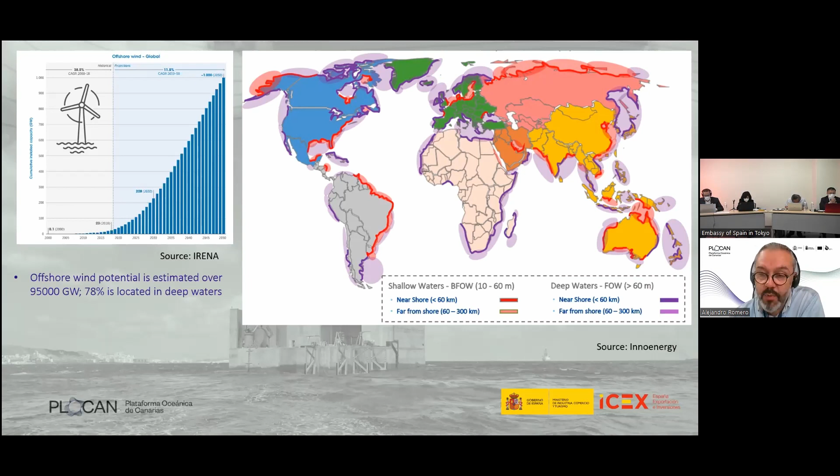So the offshore wind potential is estimated at over 95,000 gigawatts. The offshore wind technology in shallow waters is also mature. But the problem is that 78% of the offshore wind resources are located in deep waters, and in those areas, the turbine and its platform must float. There are several layers that boost or block floating offshore wind projects. Some of those are related to the infrastructure, ports or grids, the supply chain. Also, regulation and legislation is a key factor for the deployment of new wind farms.

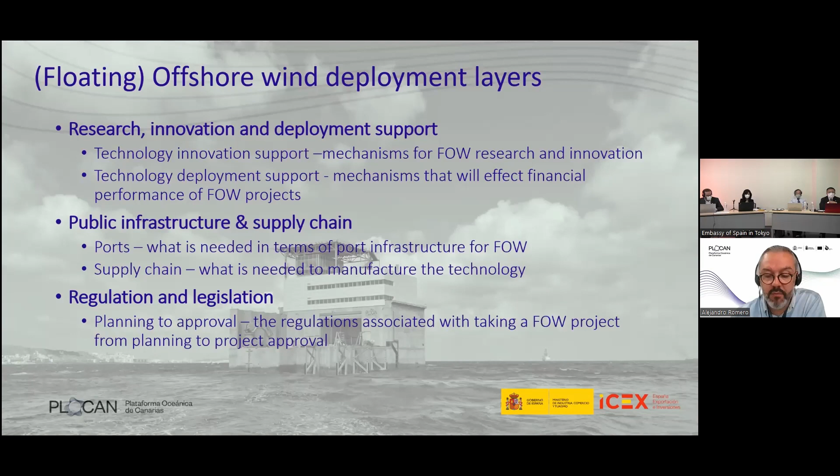But Plocan is working on the first layer that you can see in this slide. So we are focused on research and innovation as a booster of the technological development of the offshore wind industry. At this stage, the barrier is mainly located in the capex and opex of these infrastructures. And we need to have clean energy, but also cost-effective and robust. For this purpose, Plocan provides a combination of services to the users of our infrastructure to help them achieve levels of development close to the market.

So how are we doing this? Mainly by providing a real scenario for the performance of prototypes, most of which are close to the market, but they need to be validated in a real scenario. Not in a test basin, not in a numerical model, but in real sea conditions. So for this purpose, we have a 23 square kilometer piece of the sea on the island of Gran Canaria, with depths from 0 to 600 meters, where prototypes can be validated in a real scenario by monitoring not only the performance of the prototypes, but also the interaction with the environment.

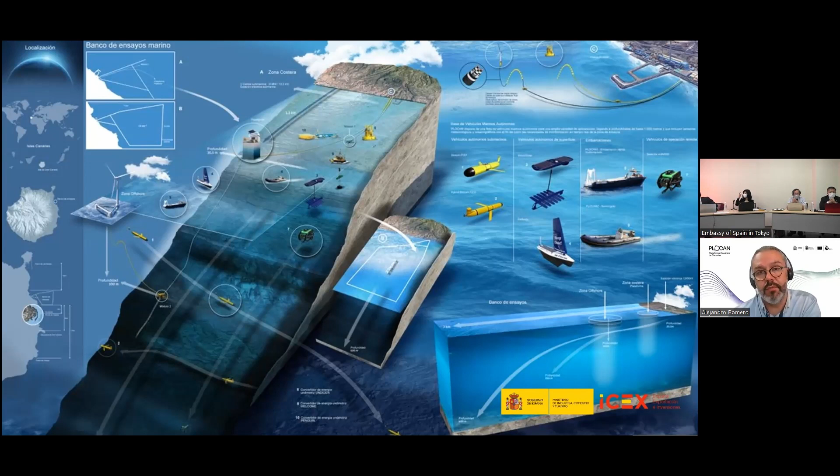This test site is powered by two 5 megawatt cables in order to export the power generated by the prototypes to the grid of the island. And in the middle of the test site, we have an offshore platform as a control tower of the whole test site, but also as a smart grid, which integrates the energy from the different prototypes in a smart way, consuming it by the platform itself when necessary, exporting to the shore, or in the near future transforming this electricity into other energy vectors like hydrogen.

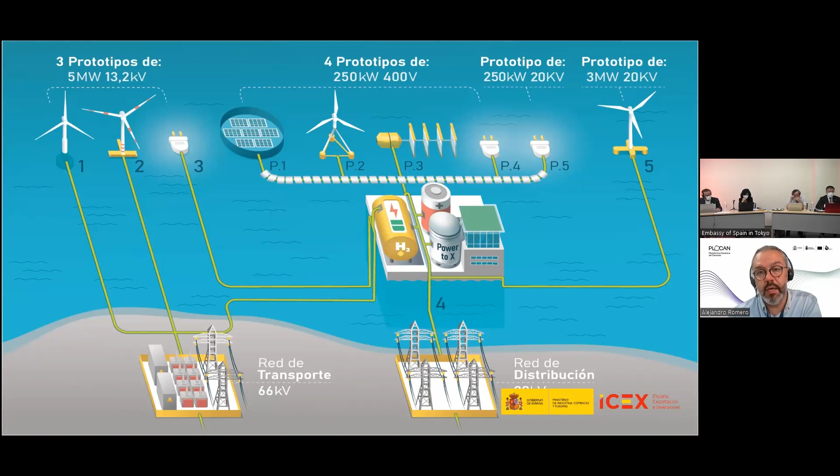The problem is that this infrastructure is not enough for the market, is not enough for the developers, is not enough for the industry and for the researchers. And for these reasons, we have signed a memorandum of understanding with the port authority of Tenerife in order to use the infrastructure for specific prototypes.

And another test site in the south of the island of Gran Canaria has been included in the draft of the Maritime Spatial Planning that has been already mentioned by Tomás in this session. This test site has more wind resources because we have more resources in the south of the island, achieving levels of 10 meters per second. And we will increase the power capacity since our limit in the test site of the north of the island is 15 megawatts. So in this test site of the south, we will achieve even 50 megawatts for the deployment of the different prototypes.

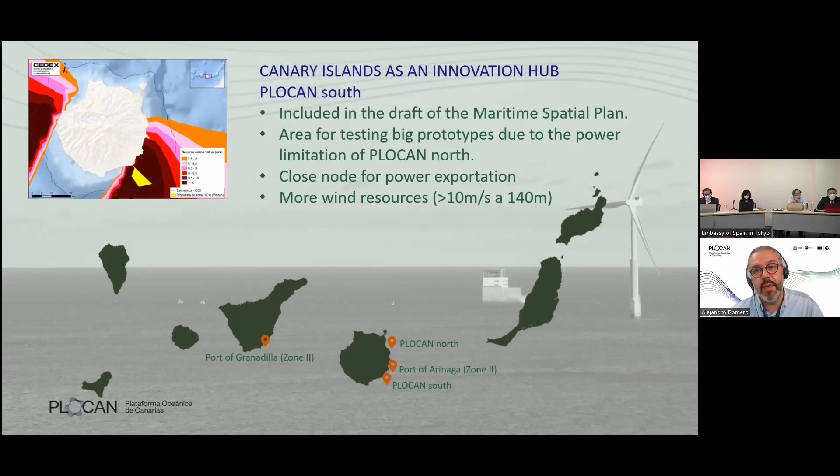So right now, among other wave converters, we have a 5 megawatt prototype powering the grid, which is a concrete telescopic tower, but this is not floating. This is a bottom fixed, a gravity-based bottom fixed. This one was installed in 2018 and allows us to perform other tests related, for example, to predictive maintenance, corrective operations, etc. But specifically floating, we are really so excited to have the opportunity to deploy in the coming months

this prototype developed by the Spanish company X1 Wind. This downscaled prototype has been constructed in the framework of a European funded project named PivotBuoy. The prototype is right now waiting in the port of Las Palmas for weather conditions, since right now we have a lot of winds, a lot of trade winds, which are complicated for the deployment. So this is a 1/3 downscale of the final prototype, and it will be in normal operation at 50 meters of water depth.

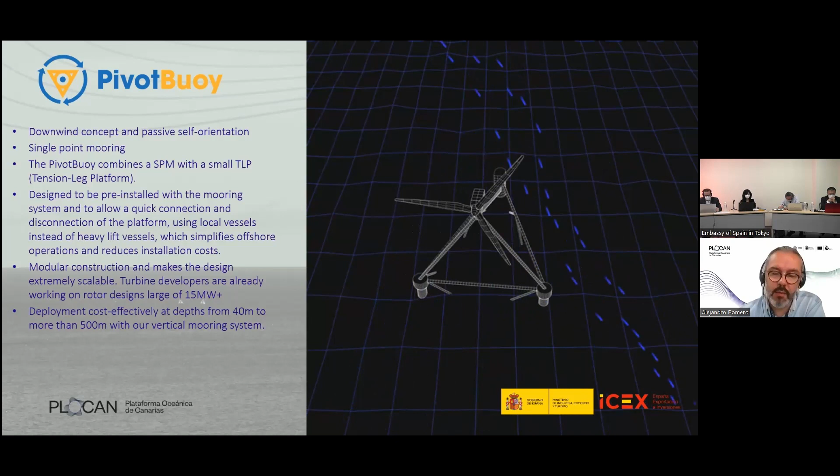In the past, we have already had the opportunity of validating disruptive concepts, like this W2Power of Enerocean, which hosts 2 turbines on the same platform, with very good results. So we are realistically comfortable with disruptive concepts. As you can see, we firmly believe that the comfort zone is a barrier for development, and consequently a barrier for decarbonization, which is our main objective.

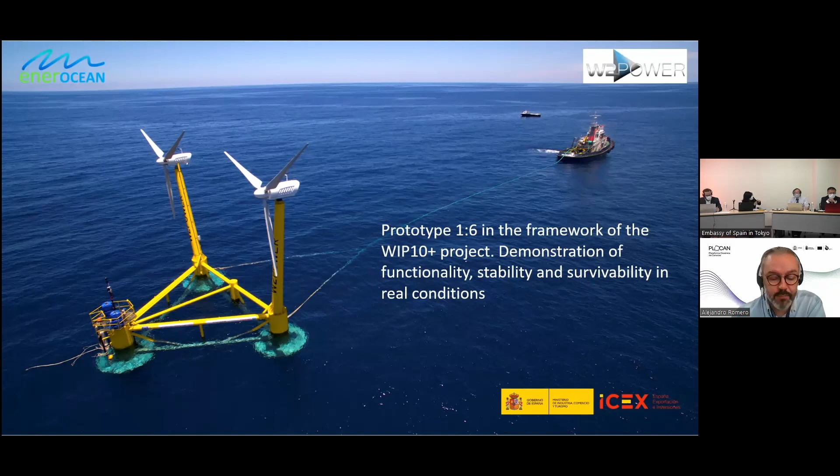Following the same commitment, we are also involved in R&D projects far away from the commercial concept, from the market. This is the case of the FLOTANT project, which is coordinated by PLOCAN. This is the development of the conceptual engineering of a hybrid floating platform made of concrete and XPS foam, which is a polymer. But this project has also faced challenges related, for example, to the dynamic cables or to the mooring system optimized for deep waters. These 2 developments are very close to the market, and consequently usable by other different technologies.

Let me finish with very good news from yesterday, because the Spanish government approved the law for sandboxes here in Spain, which is basically a specific framework in terms of permitting and consenting for experimental projects in this type of test site, like PLOCAN. So let me finish this presentation with very good news.